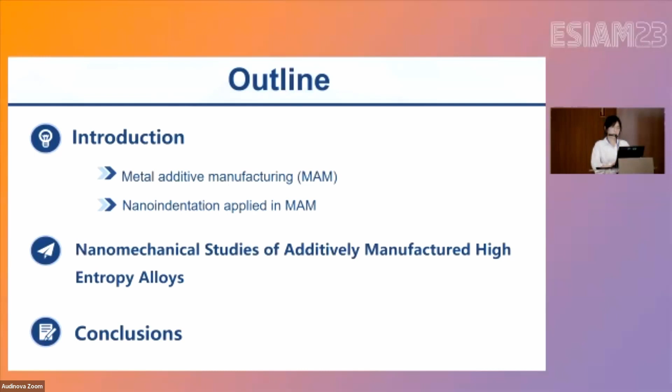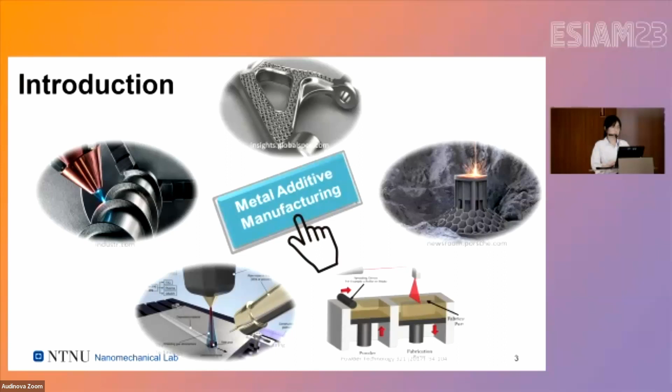So, as we all know, metal additive manufacturing has been a very attractive manufacturing method with broad application prospects because it offers several advantages, such as fast fabrication and great design freedom. And metal additive manufacturing has many unique

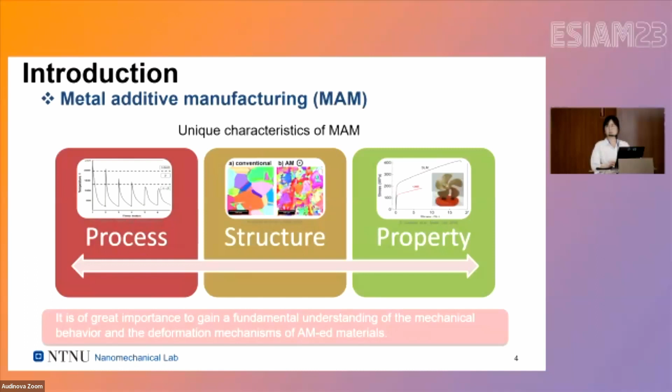characteristics. For example, during the AM process, the material experiences a very complex thermal history involving repeated heating and cooling and a fast cooling rate. As a result, the structure and the properties would be quite different from those obtained from conventional manufacturing methods. Therefore, it is of great value to gain a fundamental understanding of the mechanical properties and the deformation mechanisms of additively manufactured materials.

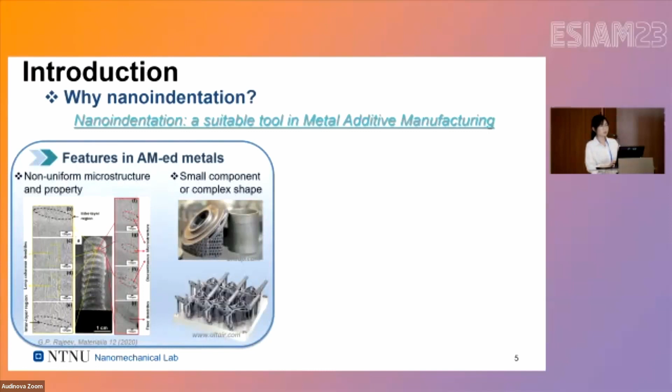Actually, in most of the research, conventional testing methods such as tension and compression have been widely used. But why do we use nanoindentation in metal additive manufacturing? The first reason is the features of additively manufactured materials. For example, for some non-uniform microstructures and properties, and also for some small components or complex shapes, the conventional testing methods are not applicable anymore.

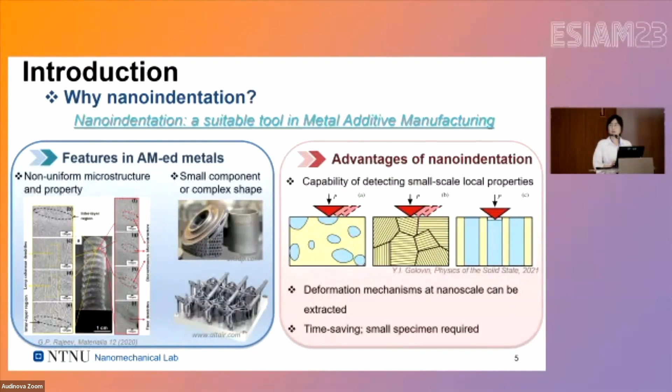And on the other side, nanoindentation has its own advantages. It can not only obtain small-scale local properties, but it can also obtain deformation mechanisms at the nanoscale. Furthermore, nanoindentation is a time-saving method, and only very small specimens are required during the tests.

So, a brief introduction to nanoindentation. The nanoindentation technique applies the indenter into the surface of the sample, with both the load and depth in the nano or micro scale. And as can be seen in this image, the load and the displacement are recorded during the process. So it gives real-time measurement of the load and displacement.

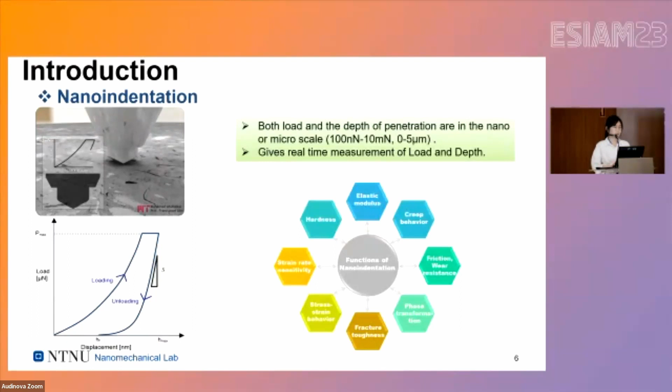So from this load and displacement curve, we can analyze the mechanical properties, and the elastic modulus and hardness are the most commonly studied mechanical properties. And besides that, the creep behavior, strain rate sensitivity, stress-strain behavior, fracture toughness, and so on, can also be studied by this method.

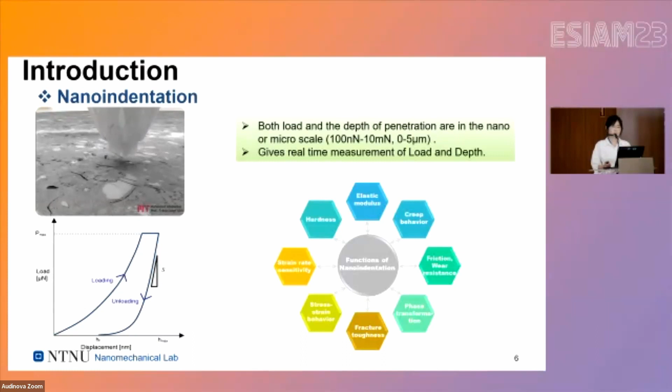And now let's move on to our study regarding the nanomechanical properties of the additively manufactured high-entropy alloys. So what are high-entropy alloys, and why do we say they're quite interesting? As we all know, conventional alloys are made by adding a small amount of a secondary element into the primary element. But differently, high-entropy alloys contain at least 5 elements in equal or near-equal atomic percentage.

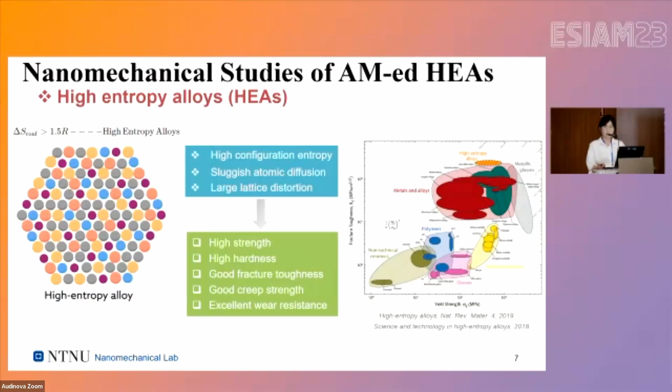So this material has the high configurational entropy property, and also sluggish atomic diffusion and large lattice distortion properties. And previous studies on high-entropy alloys have found that the fracture toughness and yield strength are quite higher than other materials. Furthermore, there are also other properties such as good creep strength and excellent wear resistance. So it has attracted lots of attention in recent years.

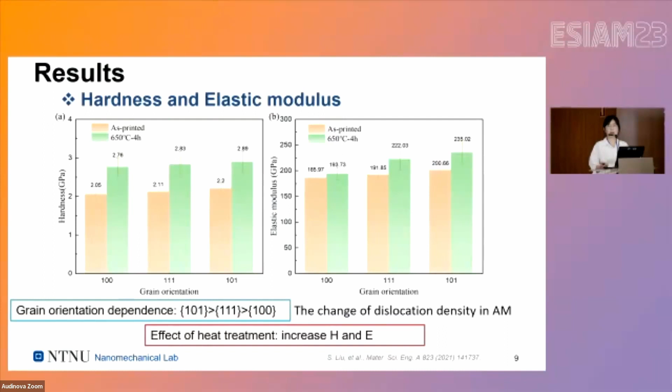And if we compare the results between the two samples, we found that the heat treatment can increase the hardness and elastic modulus. That might be because of the increase of the degree of short range order domains during the heat treatment.

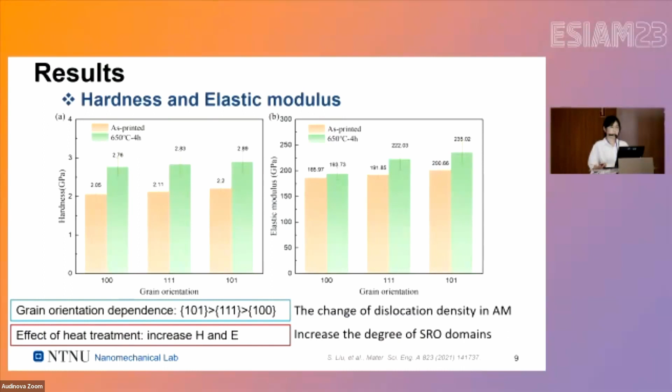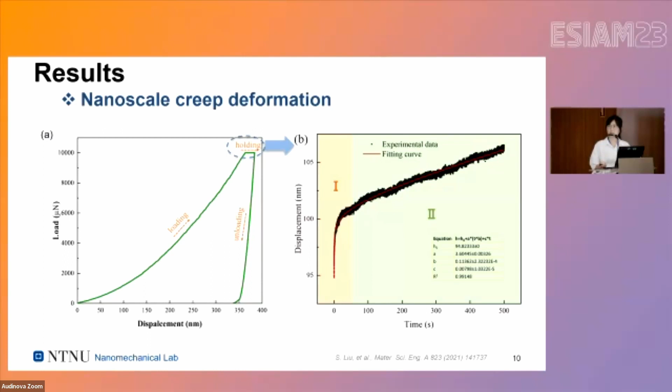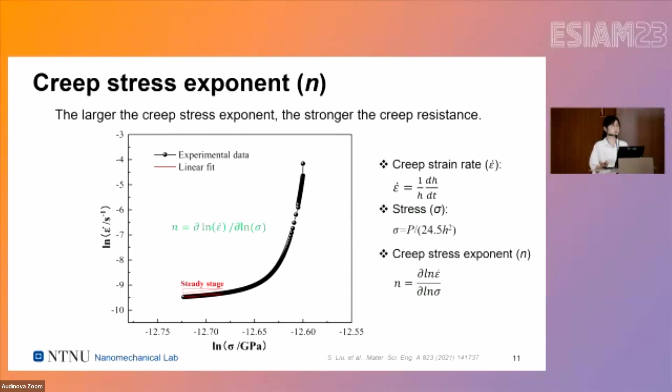From this stage, we can obtain an important parameter, which is called the creep stress exponent. It can be regarded as an indicator of the creep resistance. That is, the larger the creep stress exponent, the stronger the creep resistance. So we plot the distributions in different samples and different grain orientations.

We found that in the printed sample, there is a strong grain orientation dependence, but in the heat-treated one, this grain orientation dependence is not as strong. In both samples, the grain 111 has the highest n value, which means grain 111 has the highest creep resistance. And we found that the n values in the heat-treated sample are smaller than the printed one. So we can conclude that the heat treatment decreases the creep resistance and the creep anisotropy.

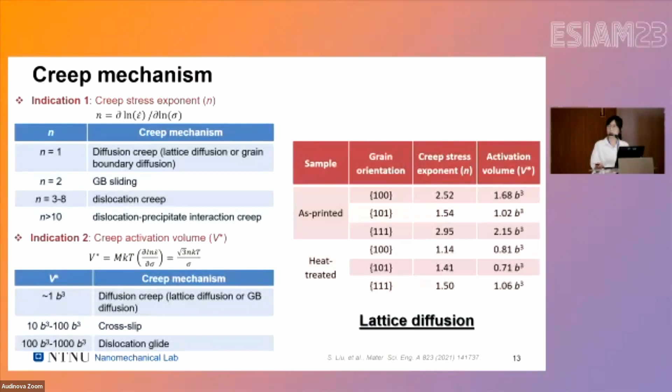If we would like to further understand the creep behaviors and estimate the creep mechanism, there are two indicators. The first one is the creep stress exponent, and the second one is the creep activation volume, because creep is a thermally activated behavior. As you can see in these two tables, different values indicate different creep mechanisms. We summarize the results of these two indicators in different grain orientations and samples, and we found that lattice diffusion is the dominant mechanism in these two samples.

So my conclusion is that nanoindentation is quite a powerful tool for investigating the mechanical properties in AM and understanding the deformation mechanisms. In our current work, we found the grain orientation dependence on hardness, elastic modulus, and creep behavior, and the dominant creep mechanism of the additively manufactured HEA is lattice diffusion. We also found that the heat treatment can increase the hardness and elastic modulus.

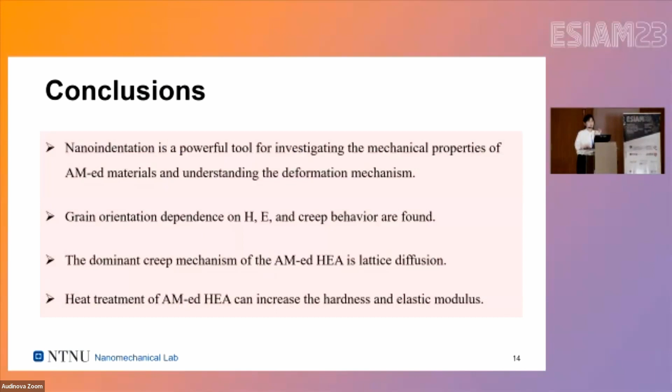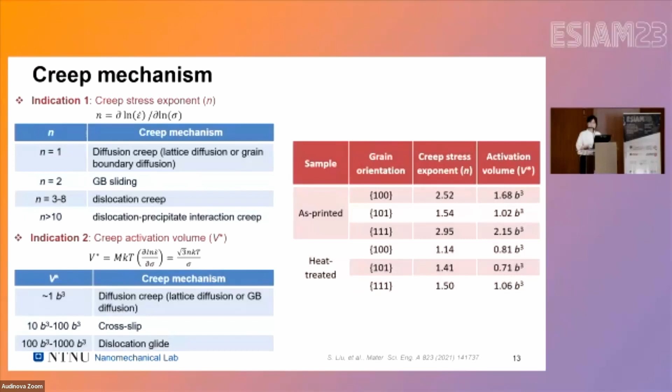What do you mean? If I understand you correctly, you mean that the small deformation volume cannot represent the whole mechanical property of the material, right? You obtain a high variation depending on the location of the measurement. You mean the deviation of the results?

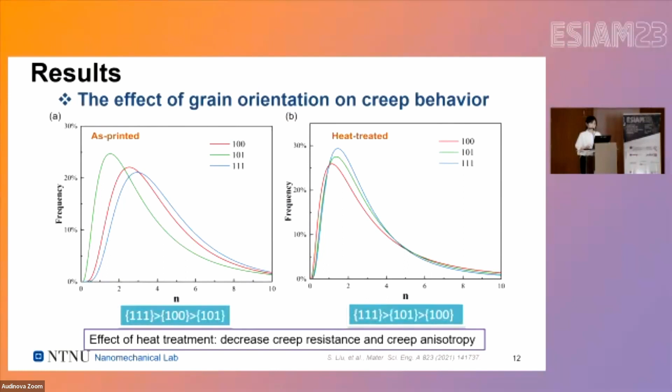Yes. That's because nanoindentation has a very small deformation volume, so the dislocation density in different regions might vary a lot. The results would be influenced by microstructural properties like the dislocation density and some precipitates in the microstructure. That might be the reason. But from our results, we can analyze the mean value and the trend to study the differences between samples or orientations, to have an overview of the mechanical properties and see the tendency or the effects.